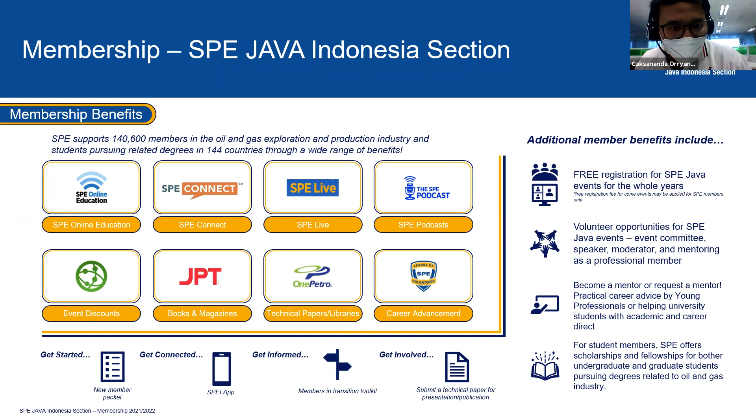Next slide, please. Sorry, technical difficulty. Can you still see my slide? Yes, but it's still freezing. Okay, sorry.

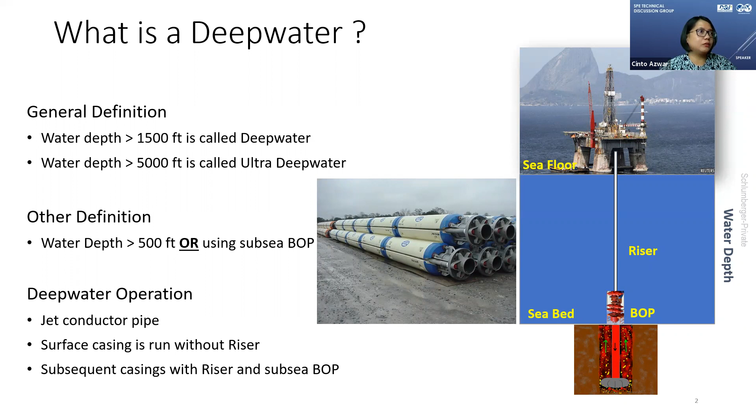Okay, next one. Do you see this? How do I move this one? Do you see the one on top, on the screen on my slide? Oh no, do you see the control, the white control? No, it's just me, it's blocking my view. Oh okay, it's from the Zoom.

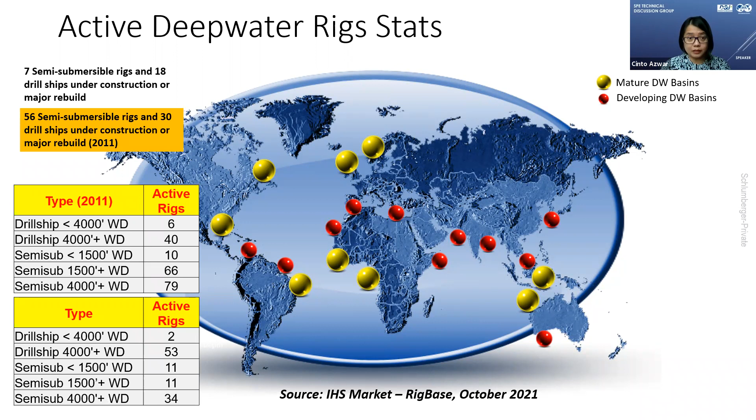And you can see that at that time, they were also building a new semi-submersible rig, 56 of them, and 30 drill ships under construction. So 2011 is when activities started to pick up quickly after the 2010 very short-term downturn, and then we were quickly picking up, especially after the Macondo incident, raising activity including deepwater as well.

This slide is another one with a very similar message, just to let you know on the... hold on, I'm messing around again with this view, now it's blocking my view.

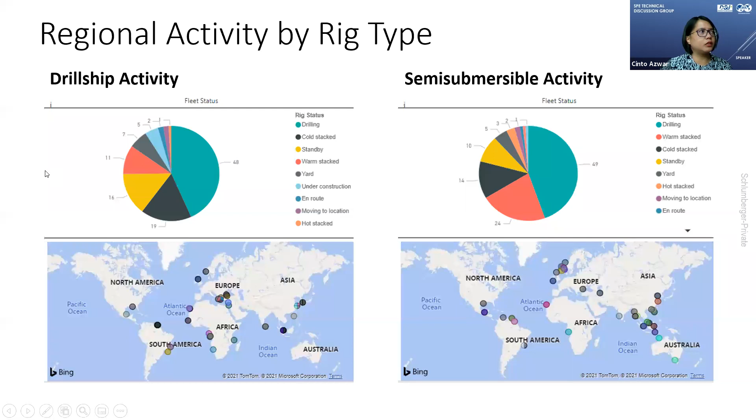About regional activity by rig type. It's the same numbers, but distributed into different areas of the world between drill ship and semi-sub.

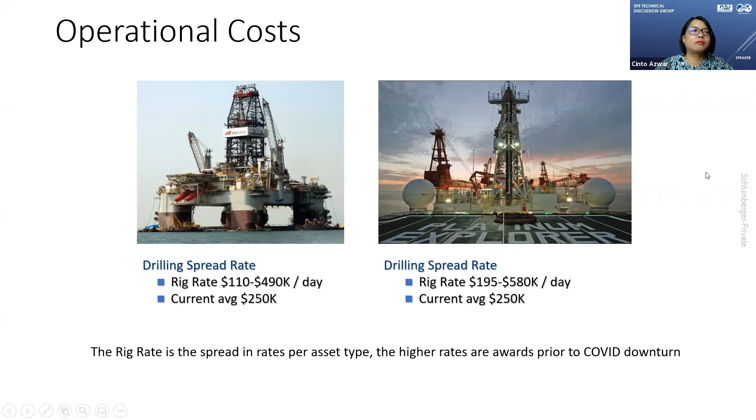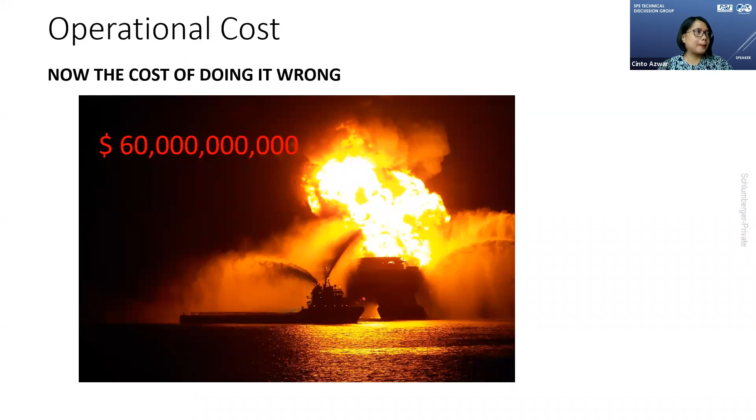The last data shows the operator needing to pay criminal and civil penalties, natural resources damages, and cleanup costs, easily reaching 60 billion US dollars by now. For those of you who haven't seen the movie, go watch it.

Since we're all working in the energy industry, it's very interesting because all the technical terms are there, and it feels so relevant to your life, especially if you've worked on a deepwater rig. It's very interesting - you'll find out what's going on, with a lot of drama added of course.

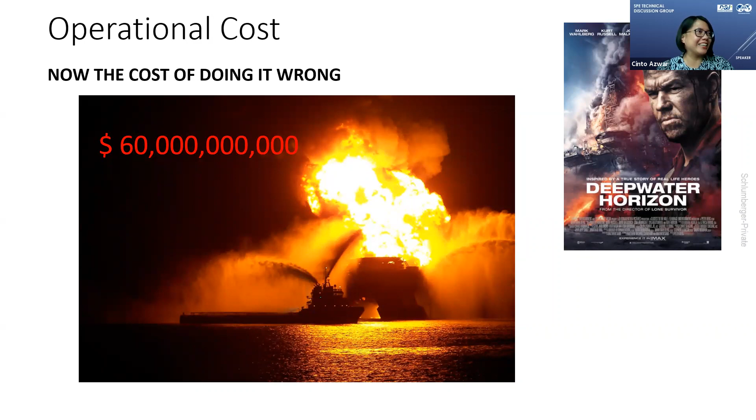And of course this involves high pressure at the bottom hole pressure. Okay, so up to this point, any questions?

I think it's very interesting, the data you presented. Between 2011 and 2021, it seems to me that even though the number of rigs is reducing, they're moving towards deep water. Does that have to do with formation availability - drilling deeper every year because the shallow ones are already drilled? Or do you have any opinion about that?

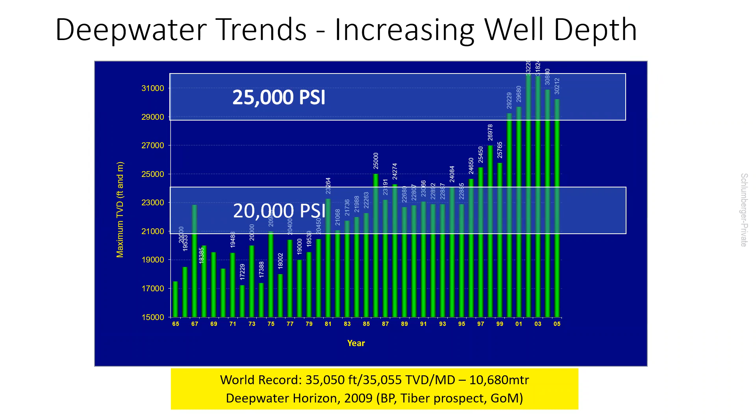Yes, basically they wanted to reach the biggest reserves available. The higher the market, the bigger the demand, then they calculate and it becomes economically profitable, so they go deeper. From 2011 onwards until the downturn, everyone in the industry was investing a lot, because they wanted to facilitate this ambition by the operator to reach that reserve and produce. That's why the drilling companies, the rig companies, were investing and building so many rigs at the time.

Probably because the price is also pretty similar between semi-submersible and drill ship. It's getting cheaper, the rig spread rate. And then the number of rigs is gone, because there's less demand - it's too expensive operating to try to produce oil that's a lot cheaper than it's supposed to be. The ideal situation, when people were drilling a lot in the water, was at $100 per barrel. So when it goes down, they chop off the deepwater rigs, especially the old ones, retiring them in the junkyard.

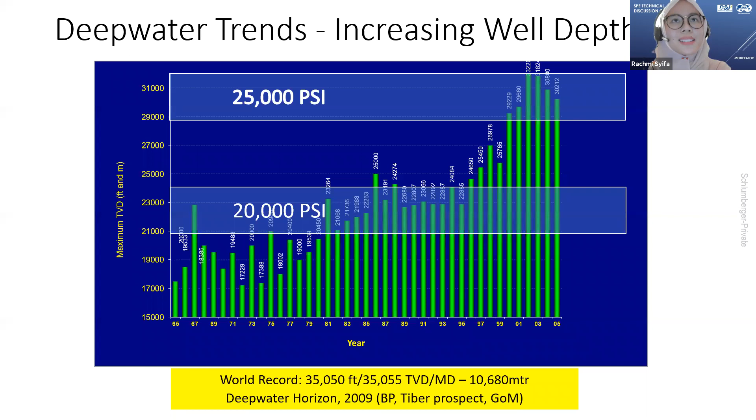The Chevron IDD is of course directly related to economics, right? So, the Chevron IDD plan is to drill and develop their field more after West Seno, but it got delayed, and with the 2020 downturn, it's going to be difficult. I don't see it, but we have people here in this call, like Mas Bayu, who are going to start up their deepwater operations, right? So some operators see potential because now we see the oil price is increasing, right? It's going in the right direction for us working in the industry.

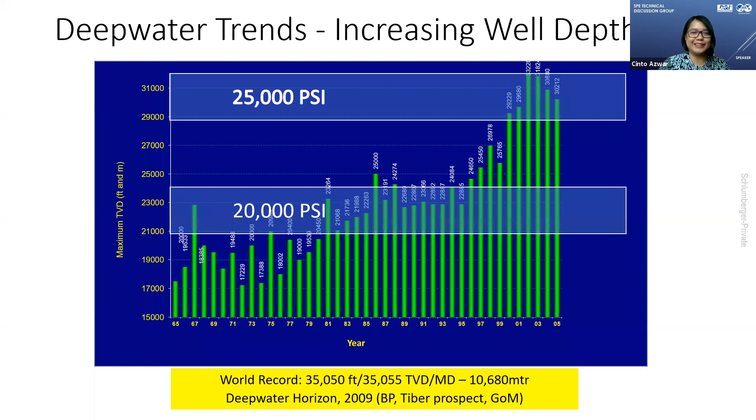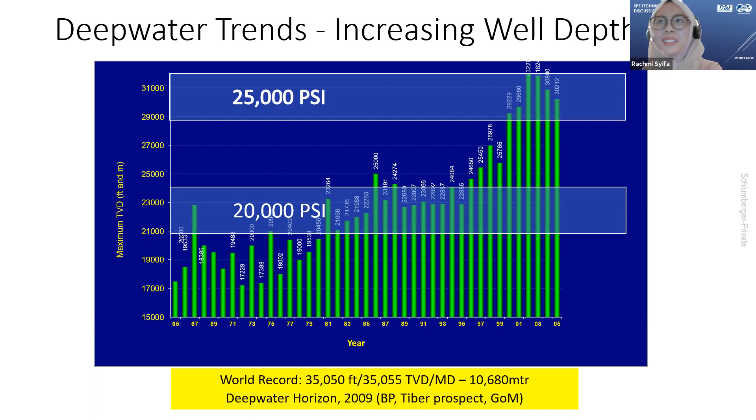So investors or operators that have locations in deepwater in Indonesia are starting to drill again. I know two operators are starting at the beginning of the year, and some of them are actually attending this call. So we are excited, hopefully we are back to 2012. Yeah, fingers crossed, Mbak Cinto. Looking good so far. Okay, continue Rahmi, go ahead Mbak Cinto.

All right, so now we go to the overview of cementing services in deepwater operations. It is a mature and emerging market, nothing new, so we all know the challenges. The industry already has the right technology, mitigation plans, and solutions for these challenges. So the cementing challenges are becoming technical drivers in deepwater.

So all the challenges we see, for example operational cost - we want to reduce the number of standby or waiting periods. That's why even the rigs now come with dual derricks, so when they're still drilling, they already start running casing. I think you've seen this before, right Rahmi? In drill ships, it's really possible now.

Operational cost is one of the challenges that everyone in the industry will find a solution to lower down. There is also shallow hazard challenges, which include water flows and gas hydrates. And then we are dealing with a low temperature environment, because the seabed temperature could be as low as 2 degrees, or even 0 or 1. Usually it's around 2 to 4 in Indonesia.

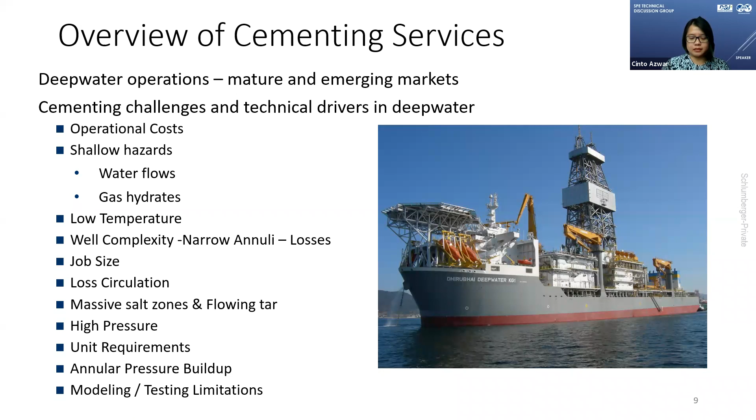You have what they call annular pressure build-up, which also only happens in deepwater wells. And then there's temperature modeling that has to be accurate. The testing is also different than in other environments.

So now we go to the first challenge, shallow flow hazard. In deepwater areas, we often find heavily water-saturated or high water pressure formations. Geopressure sand bodies usually occur on the top section, between 600 feet to 2,500 feet below the mud line. There are 3 types of shallow flow hazard: water, the most common one, flowing once you open up the hole; gas or hydrates; and formation fines.

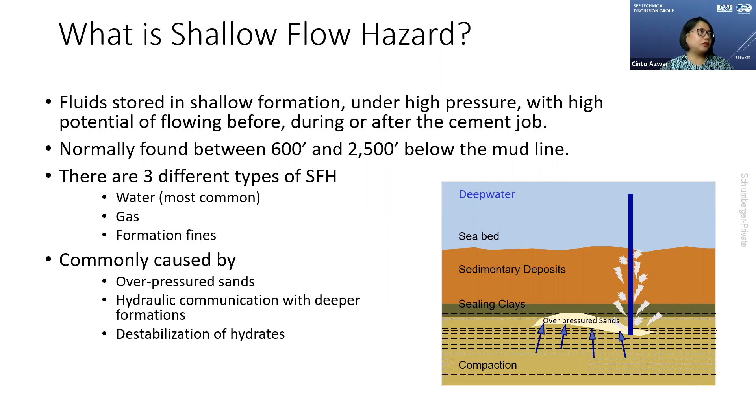It's commonly caused by high overpressure sand at the top section. If we drill into one body that is isolated, probably the result is not too bad, you can handle it while you're drilling. But if the sand bodies are connected to different sections, drilling into one of them can cause water to flow or gas to come to the surface, causing extensive damage to the borehole and the well site itself.

So how does the shallow water flow look like downhole? I have a video here showing the shallow water flow, one example at the seabed. The movie was taken by the ROV on the seafloor. Let me just play the video. It's without sound.

Okay, so you can see from the port, the low pressure wellhead, the water is just flowing because we cannot control it. We fail to control it, right? So this is giving us a safety and environmental risk.

This flow can occur while drilling the riserless section, the top section. If we do not mitigate properly, it can also occur during the cementing job. And if it happens during the cementing job, or after post placement of the cementing job, then you will lose the isolation that you are expecting to get from the cementing job.

The erosion of the seabed and drill hole due to the continuous flowing of water can weaken the structural support at the seabed on the conductor casing, reducing or failing the integrity of the BOP and the riser. It's very difficult to remediate or fix this. You can easily lose your well because of this.

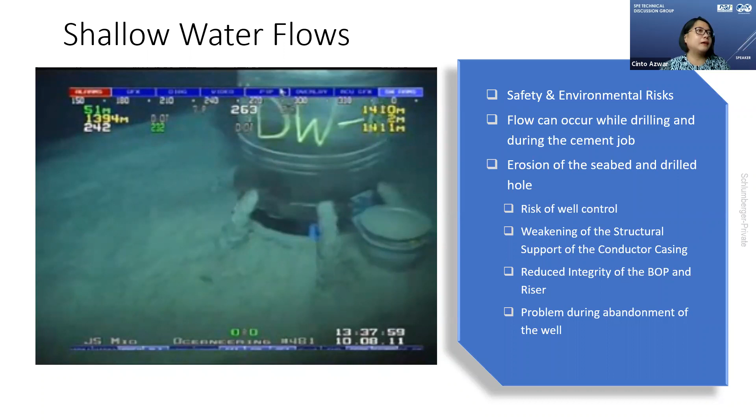So it's really important and crucial to be ready and have a good subsurface assessment, so you know if you do have this kind of risk. If you are drilling an exploration wildcat well and you have a doubt, my suggestion is do not take any chance, because once we have this flow, it's very difficult to remediate. It's a very high cost risk. The next one is hydrates, or gas hydrate.

So what is gas hydrate? It is a solid, ice-like compound of natural gas and water. It is formed in high pressure and low temperature conditions. And how do we destabilize the gas hydrate?

If we know from the subsurface reading that in this section, on the top section, we're going to expect a gas hydrate bearing zone, then we need to put different mitigation. We need to make sure that we won't destabilize it, or we move to a different area where there is no hydrate - that's the easy one. But if it's not possible, you have to go through that part, and there is a way to make sure that it's not destabilized. It will destabilize when the pressure is decreased or temperature is increased.

The gas hydrate near the seabed, for example, will be exposed to the drilling fluid, which has a higher temperature. And then cement hydration, when we pump the cement, will also release heat of hydration, and that will also destabilize the gas hydrates that we have in the formation. So those are the sort of things that we need to avoid.

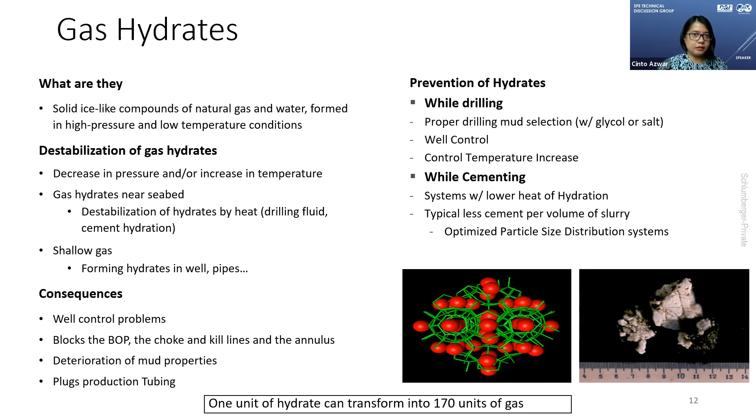This typical cement basically has a lot lower concentration of cement per volume of slurry. So there is a type of cement that has engineered, optimized particle size distribution with small cementitious material content, and this one will help you because it releases very low heat of hydration.

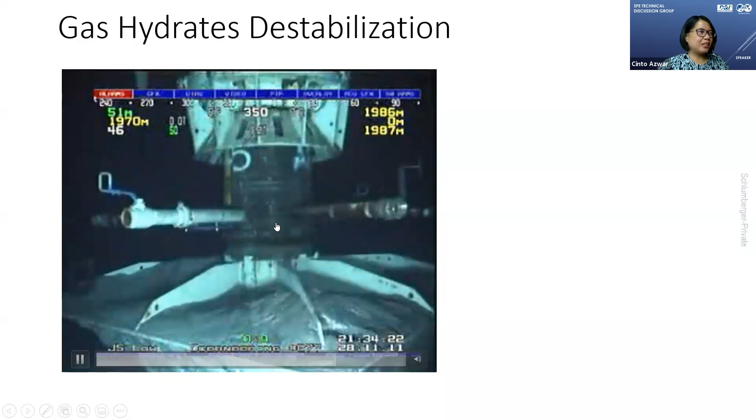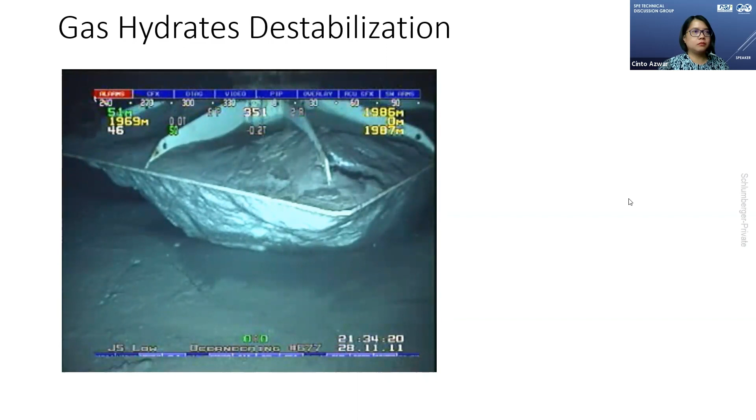This I showed you in another video of hydrates risk, which already happened in this video, and it's huge. It's forming a huge block of ice and still flowing gas to the surface. So, short video, no audio. You can see here. Okay, and this is the production tubing that is already plugged with the hydrates.

Okay, continue Rahmi. So we have an interesting question on the chat box from Pak Priyo Utomo, a quick question to Ms. Cinto Azwar. From the 2010 Deepwater Horizon incident reports, BP had been told weeks before the explosion that the cement slurry that would be used for the well was unstable. Halliburton, responsible for the cementing process, reportedly carried out two tests of the mixture which indicated that the foam slurry was unstable. Was Schlumberger later supposed to run the CBL or other QA tools, quality assessment tools, showing critical cementing conditions? Could you elaborate more on why BP site engineers paid no proper attention to such seemingly unsafe situations that finally led to the huge incident?

It's a bit awkward, Bapak, Mbak Rami works in BP.

No, it's okay, you go ahead first. I'll try to add some additional comments on this at a high level only, Mbak Rami. So you know everything in detail, it means you know it started it. So then at least it's a good thing, because then you know how important it is to do a cement design and execute the cement job the right way the first time, right?

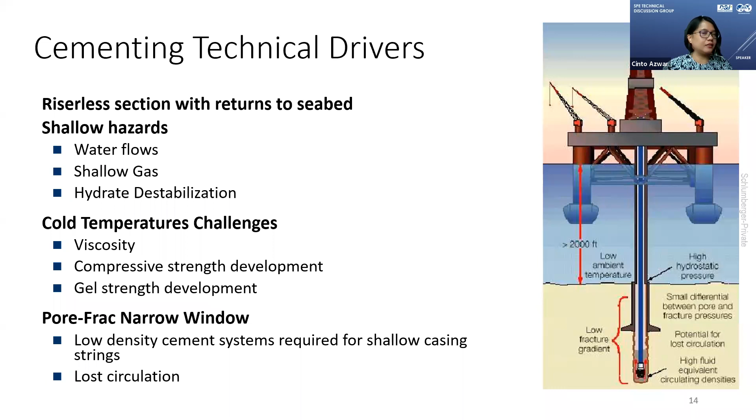Therefore, for cementing, a low density cement system is required for shallow casing strings. And then lost circulation is also there due to this narrow window, right?

So again, here I'm going to quickly explain before we go to the cementing solution, how do we actually see the challenge when the slurry can be invaded by gas or fluid at any point during the hydration period.

So I'm going to explain the 4 phases in the setting process of the cement slurry. It is important to know and understand at which point in these 4 phases the slurry properties matter, and what slurry properties we need to achieve in designing the cement slurry in order to mitigate any fluid or gas migration into the system, in the annulus.

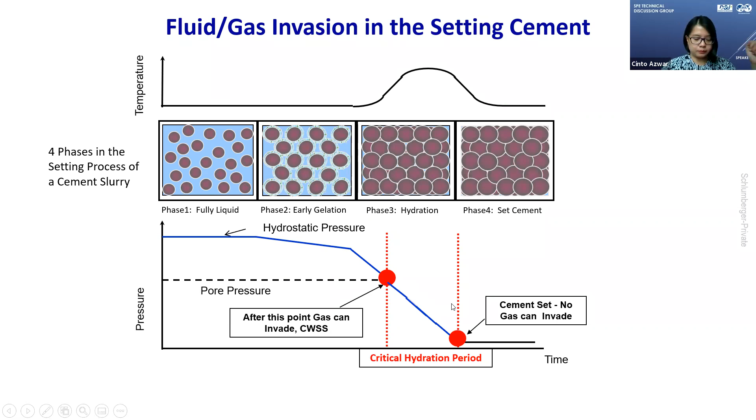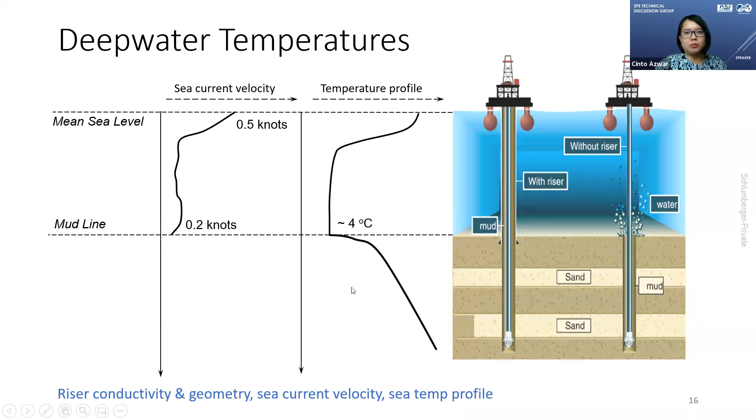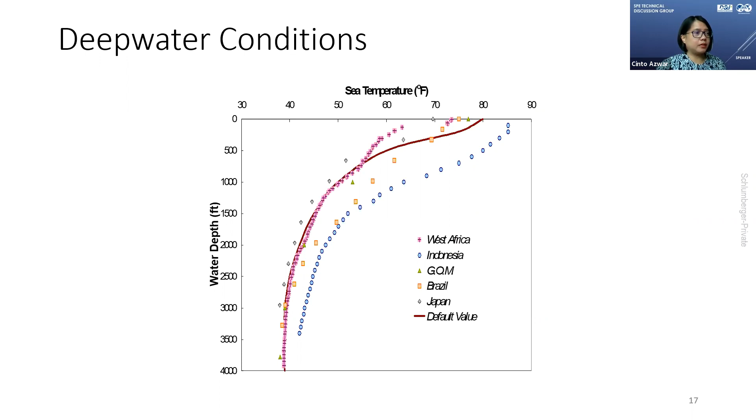Just showing you some plots of sea temperature against water depth from different areas and different times around the world. This one is from Indonesia. We also plotted Gulf of Mexico, Brazil, and Japan. This is from real measurements.

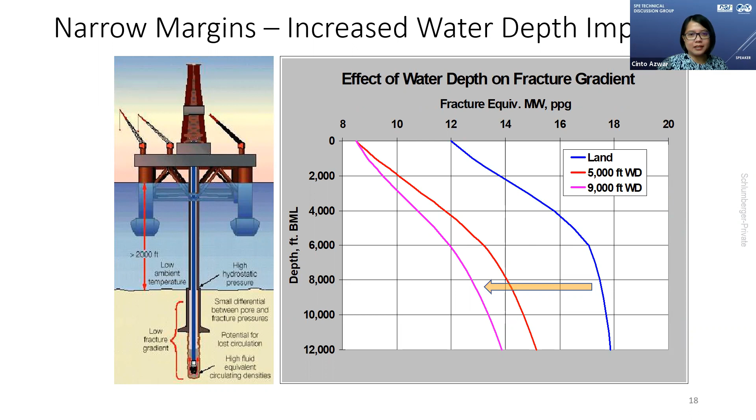This is an actual measurement comparison from Gulf of Mexico between jackup or shelf operation and the deep water one. So this shows how narrow the window is that we are allowed to operate in, from drilling and opening up the seabed at the mud line until we reach TD. The envelope available for us to drill safely is very narrow, compared to the jackup operation here on the left, which is very big.

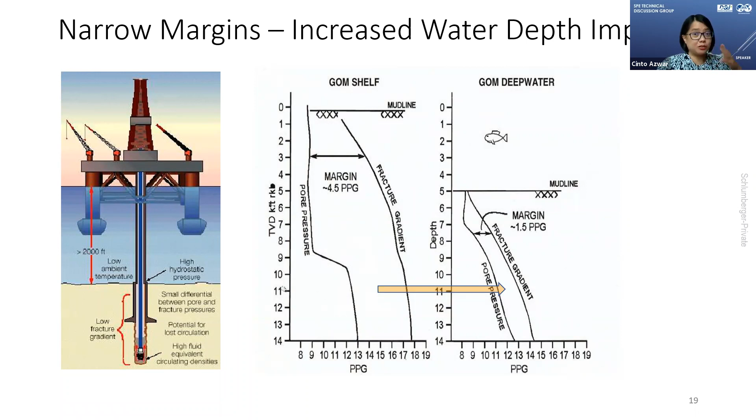So that's why you can compare, especially in the top section, you usually have a bigger window to operate, and then once you reach the production zone, it narrows down. But in deep water, you start very narrow, and then you probably stay narrow until the end, because once you reach the reservoir section, usually you will get high formation pressure also.

With that said, of course, we expect a very complicated, complex well design. This is one example. The reason we must go with this complex well construction design is because of all those challenges I just mentioned. The more you add number of strings... over here you can see we have 8 strings, and this is typical. It's not uncommon, you go to any well in Gulf of Mexico, you will see something like this.

So 8 strings, 1 contingency liner. They also have salt, especially in Africa, they have flowing tar, and of course low temperature, hydrate. What else do they have? Due to a lot of casing and liner of different sizes, we are dealing with narrow annulus when cementing the section. And of course, they also have a high pressure zone at the bottom if we are dealing with a high pressure deep water well.

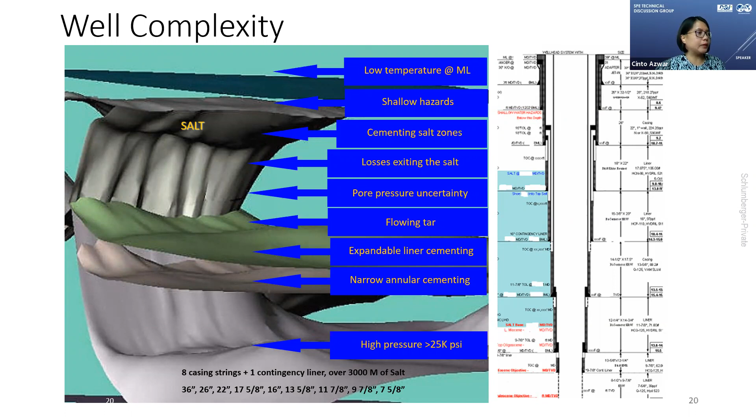So what kind of slurry properties are we aiming for with these challenges? Density gives a direct impact, of course. So we want to design it at low density appropriately, according to the envelope given to us.

Although it's lightweight, it has to have early compressive strength development, because we don't want to ask the rig to wait for a long time until the cement is set, since that increases operational cost. So lightweight slurry with high compressive strength development should come with high solid volume fraction.

If you are an operator, you can ask if the slurry proposed by the service company has a lower heat of hydration, if you have that risk of hydrate in the gas-bearing top section. Just ask if the slurry has less cementitious material per volume of slurry, for example. It usually also has to come with an improved set enhancer, a special additive for deep water that's not required in land operations. So you'll see the difference if you're an operator evaluating the slurry recipe.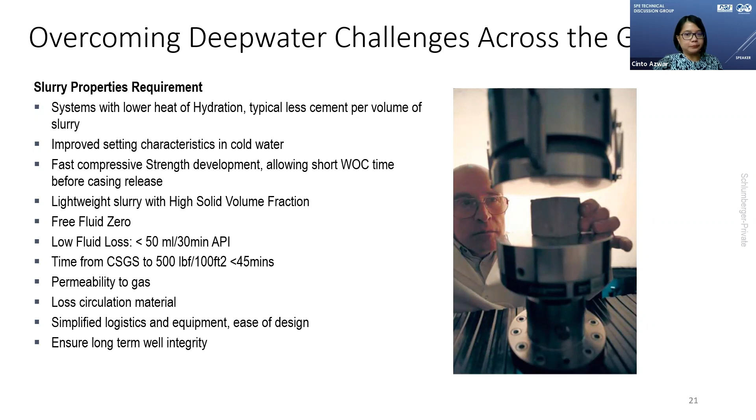Just quickly on the typical cement slurry. So OPSD is the engineer optimized particle size distribution system. Because of the water depth, make sure that the blend or the lightweight blend is competent to hold the hydrostatic due to the very big water depth. So the rating of the glass beads that is blended in the lightweight has to be high pressure, high rated.

SVF is supposed to be high as well, because we want the compressive strength to start developing very early. So this is the typical additive you can see: there is anti-foam, low temperature dispersant, low temperature set enhancer. This is the same set you will see in any deep water. There's conventional system, and then there is foam system as well. This is all designed for shallow water flow.

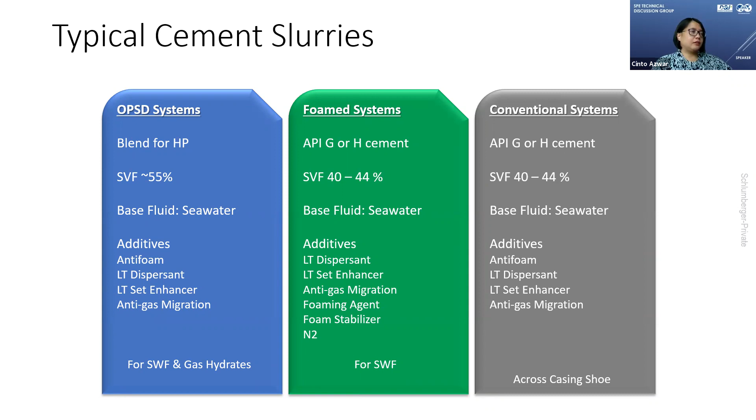We also need to practice regular cementing practice, which is ensuring good mud removal, casing good casing stand-off, centralization.

Good mud removal means we don't want to have the casing sticking up to one side of the well, for example. Therefore, when we pump the slurry, we cannot remove the whole mud completely. If we still have mud left in the hole, then our cement slurry will get contaminated with the mud. Then it will not get all the properties that you wanted to have as per what we designed in the lab.

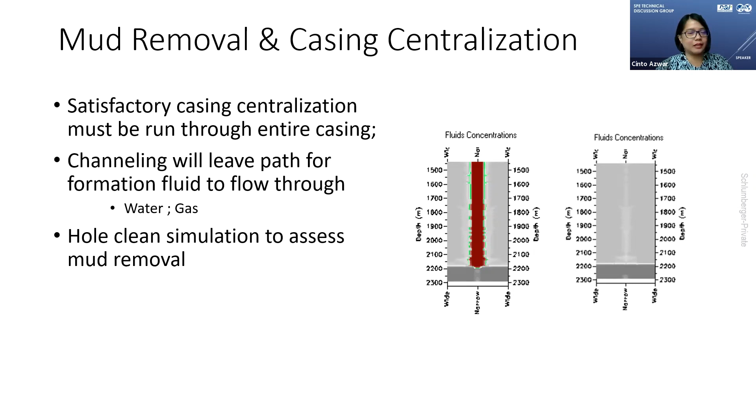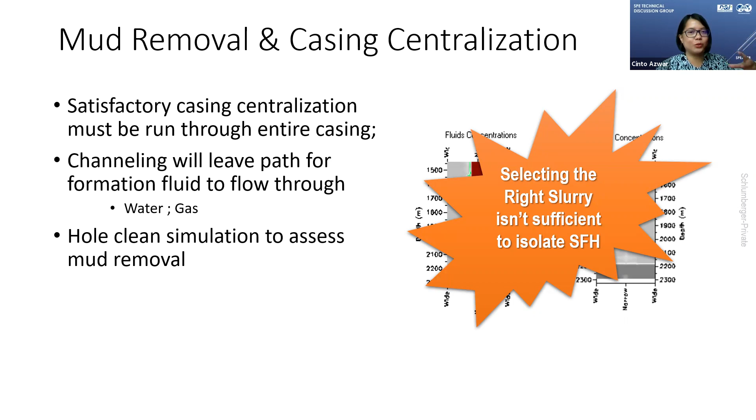We want to avoid having channeling. For all of this, you need to run enough centralizers, run the simulation with the software. All the service providers have their software now, and simulate to see where you need to put your centralizer, at how many quantity. So selecting the right slurry is not just about the fancy slurry, but it's also the rest of the practice of cement placement.

You need to have enough cement volume. A big excess is usually expected on the top section of the hole of any deepwater well. So typical annular excess in conductor casing is 200 to 300%. Surface, we are usually taking 100 to 200% open hole excess. That means on top of the hole opener size or the bit size, you put additional excess here.

Why do we need this big excess? Because the top section is very unconsolidated, and plus we are opening the hole with a very big bit or big hole opener, so it is going to create this big excess.

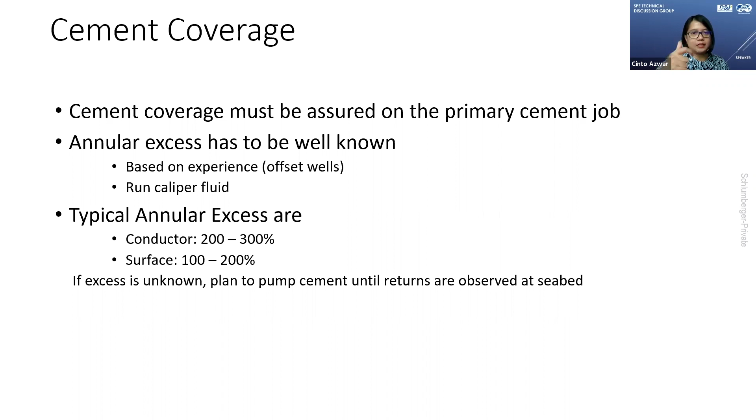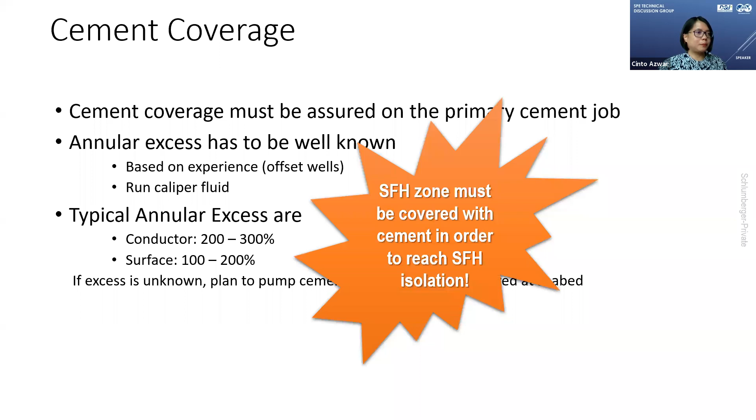We also want to make sure that the slurry is going to reach the surface, to the seabed. The whole thing from the shoe to the seabed has to be covered by the cement, because we need this slurry concrete to hold the load of the wellhead, the BOP that's going to latch on the surface casing. So it's very important to pump enough volume, enough to reach the isolation.

This is more technical calculation on the same effort of minimizing the critical gel strength period to its best. There is a given formulation to calculate the static gel strength where we start with our critical gel strength period at any point in the hole. We calculate this and then double check it against our slurry properties.

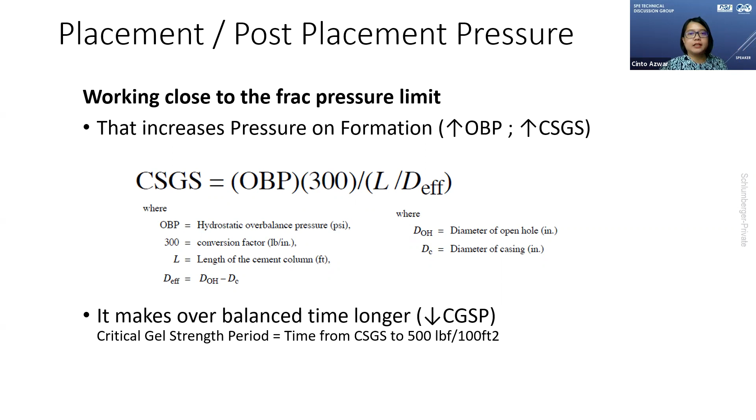So, do we have a question?

I'm curious about something. How do you balance between light slurry to avoid losses versus good mud removal or zonal isolation, to prevent gas, water, and oil flowing? Also, cement is probably one of the best loss cure materials, but how do you make sure the cement will seal the weak formation first before the circulating ECD actually breaks the formation further?

Okay, let me address the first one: how do we balance lightweight and good mud removal? The important thing is your mud is always going to be lower, if not the same density as your slurry, at least for the top section, for example, and it's always vertical.

The maximum, you cannot have angle on the top section at the seabed, because then you will have problems latching your BOP. So the top section, mostly for conductor, is going to be all vertical and maybe a little bit deviated on the surface section.

So for those two sections, if we have at least 0.5 ppg different, or sometimes I even have a case where I have to design the slurry to be at the same density as the mud. The density hierarchy is basically on the vertical section giving a big impact on mud removal.

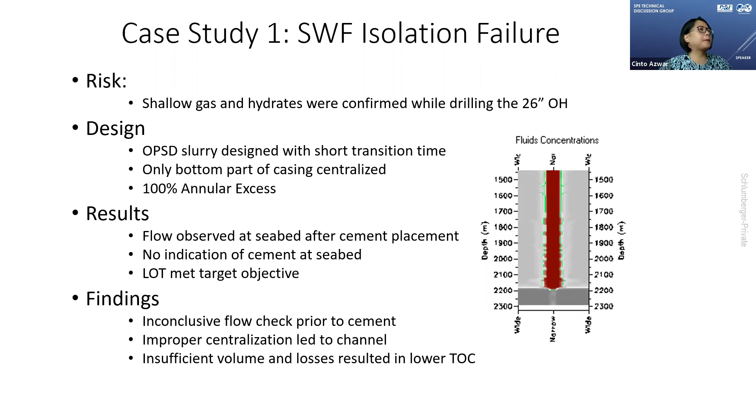Anything else? There's another question from Nisha. You mentioned about 12 hours continuously pumping, and the amount of cement pumping is also huge. How do you plan the logistics, and have you experienced any challenges? Yes, this is a very good one.

The photo that I showed you, one of our rigs in India, DDKG1 - I don't know if you remember that big drill ship photo, that's actually from my own collection. That's the rig we also operated in India. It was drilling 3 wells in Andaman and Nicobar Island, very close to Andaman Nicobar Island in India, and that's very far away, while the supporting base was in Kakinada, basically a 3 day boat turnaround.

So for us to send cement to Andaman it takes 3 days turnaround - one way 3 days. And then they had only two vessels supporting. So it's logistics basically, it's a big challenge in the water, especially if you are very, very remote, like for example that case.

In Indonesia so far, I think we have like 6-8 hours, still within reach. And nowadays, because vessels come with a low rate - I've seen one rig supported by 3-4 vessels - we're actually taking it for granted right now. Before, because everything was so expensive, we had to stretch and had so many limitations.

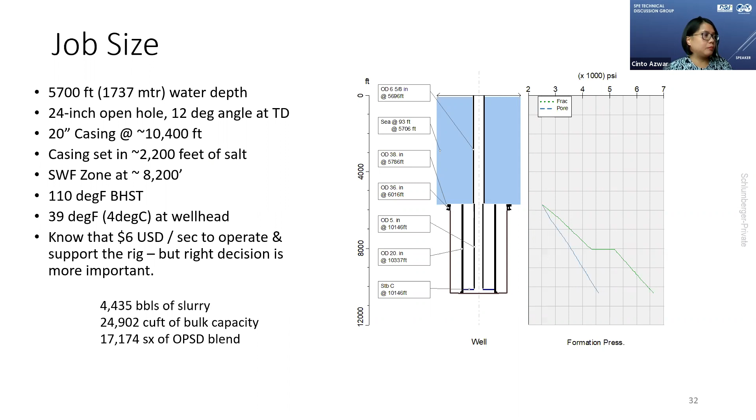The job preparation, as I mentioned, it's a good point that you brought about the remote operation and the big volume job. So the whole planning of this job is done a year before. So this is a lot of engineering in front, which is a year before for this case.

It's involving 6 different slurries because that's a long section, right? We want to have different setting time on each slurry in different layer. Otherwise, if the whole thing comes with 20-hour setting times, then we will have a much longer wait on cement times until it starts to develop the gel, the compressive strength, right?

So although it's one type of slurry density, it comes with different types of setting time, from the casing shoe to the seabed, right? So...

Extra people is required. So bear in mind, back then in a deep water operation, especially in Gulf of Mexico where everything is very mature, the cementing personnel on board is only 2 maximum. Sometimes only 1, because of the POB limitation as personnel on board quantity limitation also.

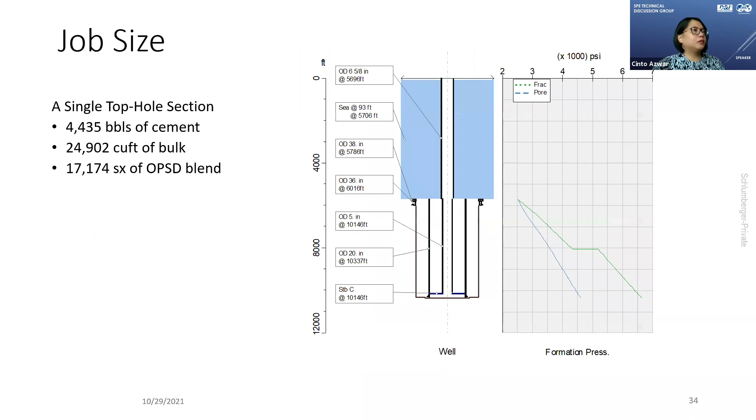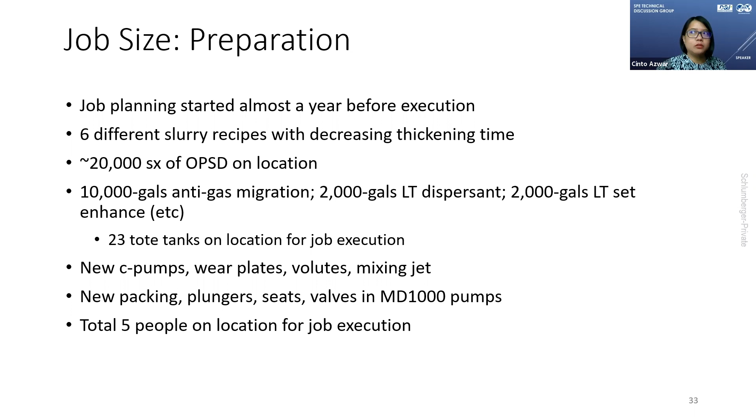So this system now, there is the one that is direct injection, directly injected to your mixed fluid line, or there is one with a drop tank. And there is also now the autonomous one where the concentration is input in the computer, and it's going to go as per the input, or you go and see your metering and you drop it manually to the big tank of mixed fluid.

So it is connected to tote tanks. We don't mix it in advance like we do maybe in land operation or in the small jackup, right? So everything has to be liquid. Otherwise, if we have a solid additive, then it's just going to complicate even more the operation, right?

Because then you need to rehydrate it, you need to make sure it's mixed properly. So if everything is liquid and you keep your number of additives simple - just the minimum is better, like just 4 or 3. If it's not necessary, don't even put it, right? So you put very minimum, keep it simple, and then you use LAS, then it's possible.

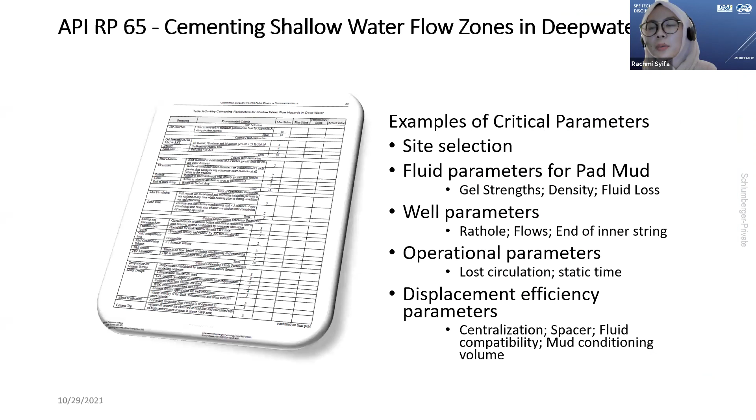So if loss circulation additives are added to the cement slurry, do we also need to add filtration loss additives? Because if we lose the water filtrate to the borehole walls, we will lose the ability to transmit the hydrostatic pressure to cement in the lower part of the annulus, and the wellbore pressure will be reduced.

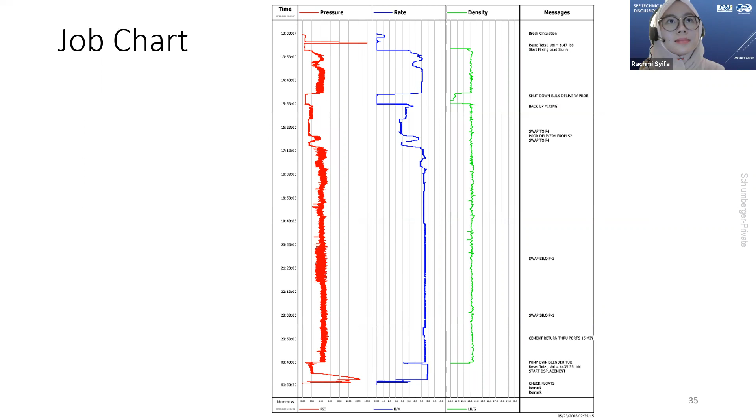Thank you, okay so that's a good one. The filtration additive control, or fluid loss - the technical term we usually use is fluid loss control. This is the additive we add to the slurry to make sure that under downhole conditions the slurry will maintain the fluid in it, even though it comes to a permeable formation, it will not lose the fluid, while it's going to be hydrated completely, right? That's the fluid loss control.

The loss circulation material is a different material. It's the one that we add to the slurry, and most of the time they are inert, so they will not give any chemical reaction or impact anything chemically to your slurry properties. Like you can put flakes, fiber, so it's not going to impact your fluid loss level, for example. So it's not connected to each other - that's what you usually call inert material.

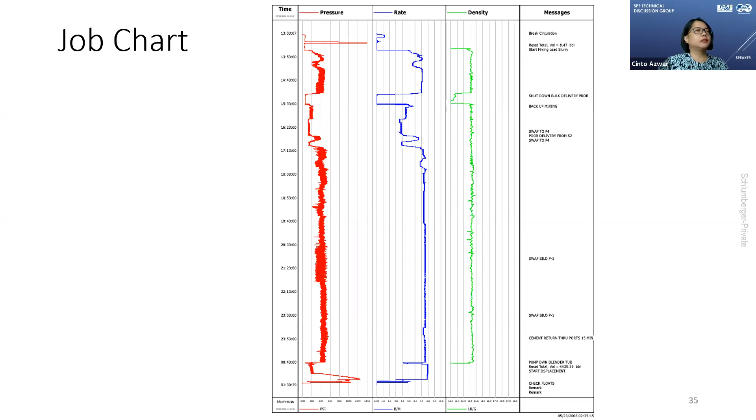So everything at the subsea wellhead is sealed completely, and there is no possible way, like in surface operations or a regular land operation, where we can bleed off the pressure in the annulus through the valve later on easily, right? So in the subsea wellhead, everything is metal to metal seal, which you cannot access. So, having this in the wellhead...

When we drill the well and then cement it up, there will be fluid trapped in the annulus, right? There will always be a risk of fluid trapped in the annulus. Once the well is in production or in drilling, maybe the temperature will rise. This fluid will be exposed to that high heat and will expand. When it's expanding, the pressure will find the easier path or way to release it, right?

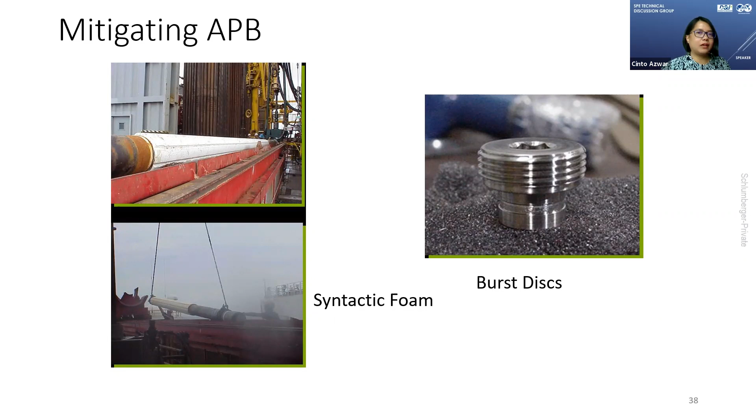You can also pump some foam spacer. There's so many things that the operator can also do, take this in mind, and plan this ahead instead of later on not being able to provide the correct mitigation plan and having the casing collapse.

From fluid, as I mentioned, another mitigation plan, you can pump the foam spacer, just to give it way to expand, to be compressed, because a foam spacer is compressible. So that's the APB, again, a unique one that we found only in deepwater.

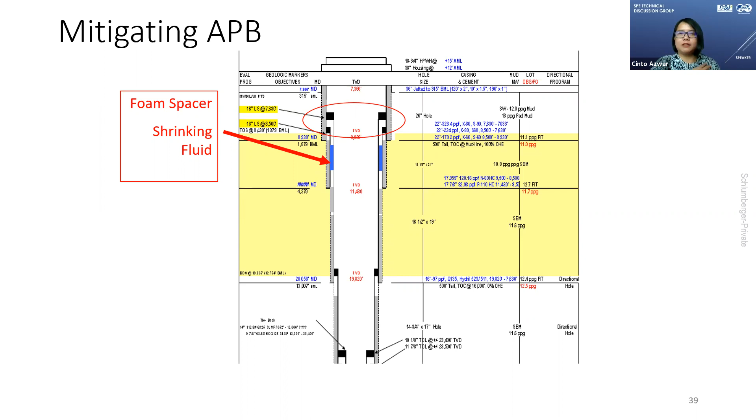So is it about any question right now, Rahmi? There's a question, follow-up question actually from Bang Isan. Relating to the previous slides or presentation, is the cementing unit and pump specification different between the conventional offshore and deep water?

The difference is usually the cement unit specification has to be in the same level as your rig specification. So if your rig is capable of drilling 10,000 feet water depth with 10,000 feet of first section with 12,000 cubic feet of bulk capacity, then your cement unit will have to be also at the same competent level. So it's something like that.

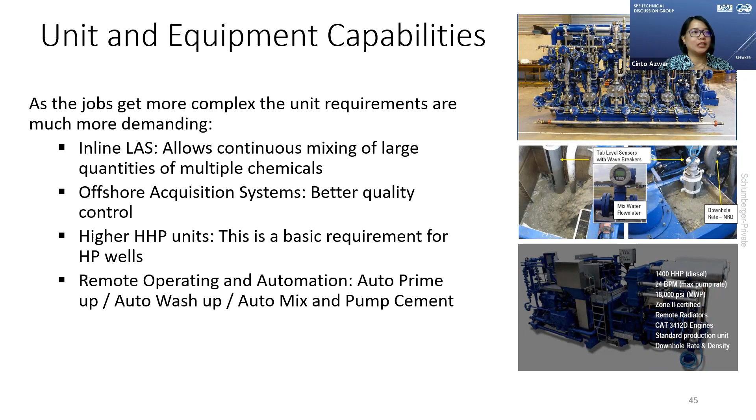Okay, so last one, this is about compliance. We talked about it during the Q&A before. After the Macondo incident, this API standard used to be API RP 65-2, which was a recommended practice. After Macondo, they formed a committee of different experts from different companies and backgrounds in cementing, and they standardized it and improved the contents.

So everything is a must now. They went through it again, so it signifies that the cementing committee's attempt and all effort was on the table to take into account all the lessons learned from the Macondo incident and take steps to limit exposure in these areas going forward.

The objective of this guideline is first to help prevent and/or control the flow just prior to, during, and after the cement job. And then what else? So it is...

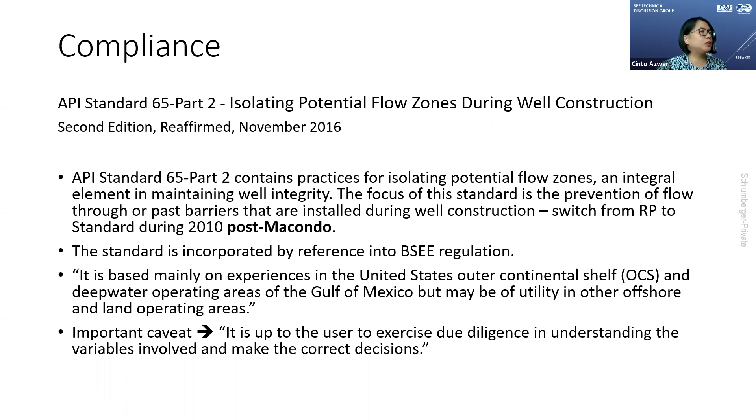I think we all know it is mainly used in the Gulf of Mexico, but I think everyone is using API standard, right? I wanted to show a different standard. It's not just API standard 65. There are many different API RPs and standards also related to deep water.

For example, the API RP 96. This is deep water well design consideration - it identifies considerations for use in deep water well design. There is also API 10B-3, which is about testing of well cement used in deep water well construction. This has all the details about how we should test the cement slurry for deep water purposes.

It's very thorough, very detailed. If you want to start a deep water operation, or want to know basically what the slurry requirement should be, go open this. You'll see, you get all the information there. Therefore, you can also challenge the service provider.

And then there are two API RPs that I put here, RP 90 and 90-2. This is all related to SCP, ACP - annular casing pressure, which includes sustained casing pressure, or what we usually call SCP. One is for offshore, the other one is for onshore.

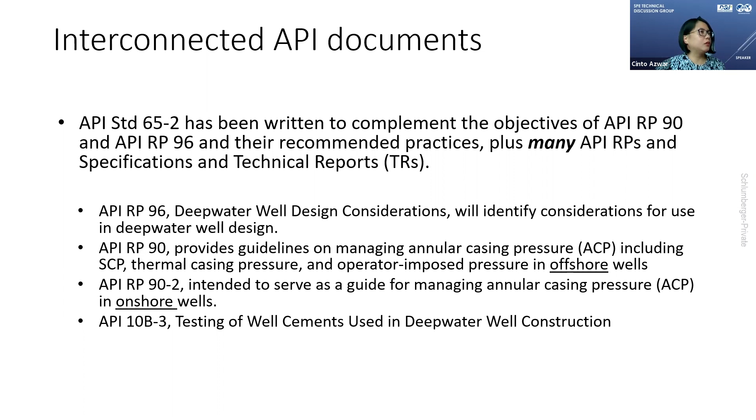So just quickly, in the API standard 65-2, it has best practices for zonal isolation. It's not just all about cementing. So you can see guidelines on hole quality, drilling fluid - what you should have in the drilling fluid, about the casing hardware, wellbore preparation, cement job execution, and the post-cementing operation.

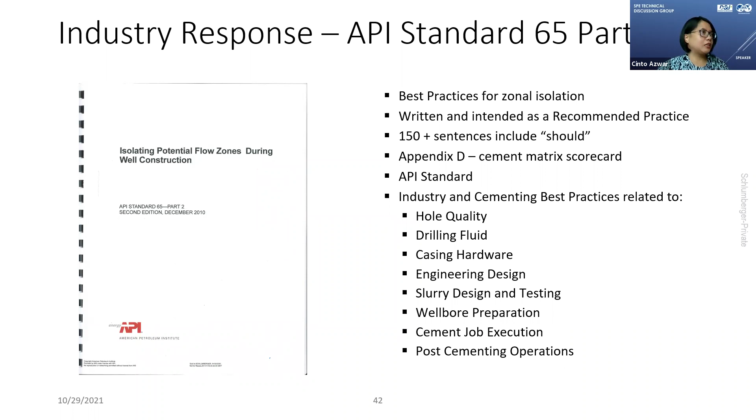This is also a very good guideline if you want to assess the job you are designing right now. We want to take into consideration all the points when designing the job, the deepwater job. Go and also check this one - it has very critical, very detailed critical cementing fluid parameters. Very good information.

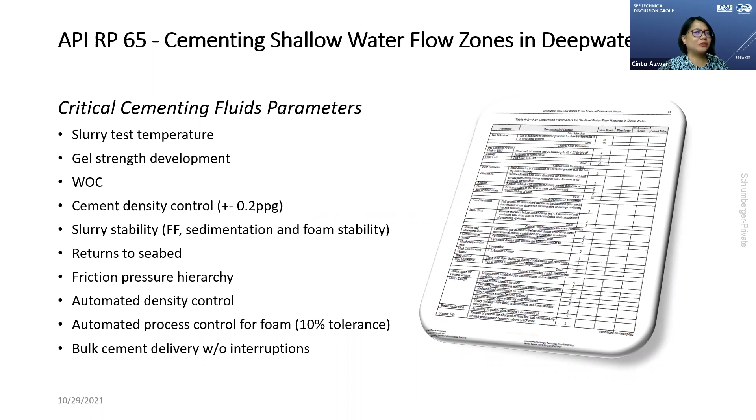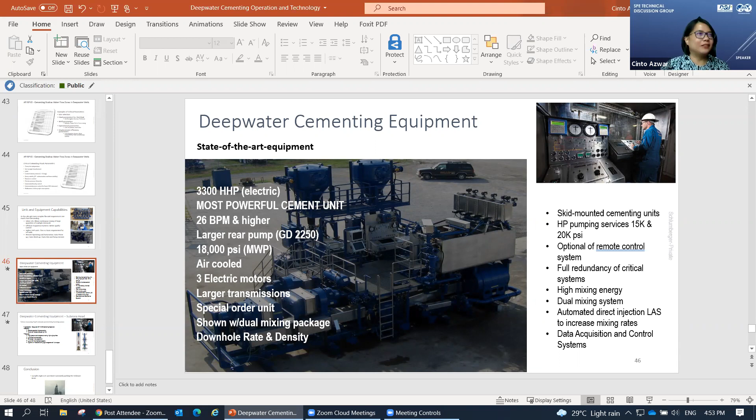Rachmi, it happened only after you cemented, because there is no other way, unless the formation is very strong. If it's very strong and not flexible, then it's just going to put the pressure towards the casing, right?

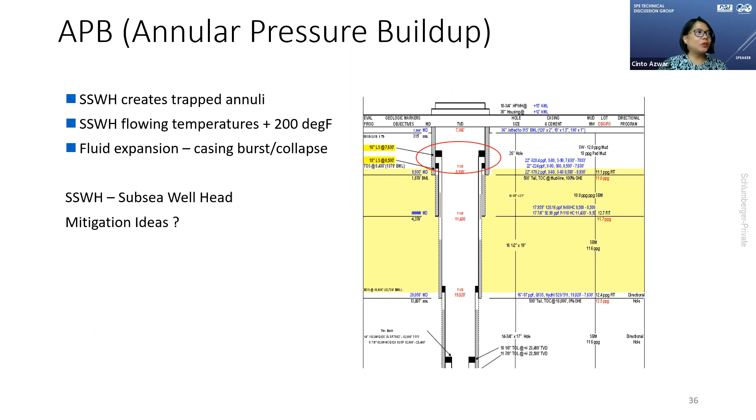So this example you're talking about during circulation, it could be also what happened. This is not cemented, definitely, that's why they can pull it out, right? So in this case, your mitigation plan has to burst this. I believe this is related to your fluid, because of the temperature rise, the fluid gets expanded and then it just bursts here because there's no way going up, right?

I think so, definitely this is what your question is. Because they managed to pull it out, so definitely it happened before the cementing job. That's right, you're right, yeah.

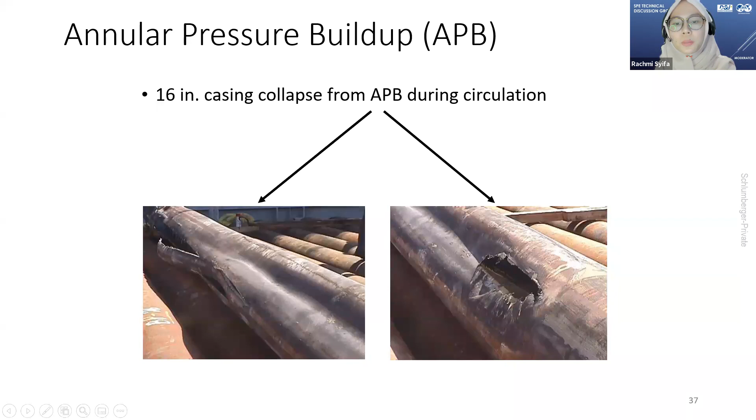capture the moment today. So everyone, if you could please turn on your camera. Someone is joining from the rig. Pak Ferdiansyah. Okay. But Ian, can you help us to? Yes, Okay. I'll take a picture now, yes? Okay, be ready. 1, 2, 3, cheers.

Tunggu Mbak, Pak Prijo nih masih. Nah, Okay. I'll Lagi. repeat ya. soalnya ada effort. Pak Priyo. Ayolah. Okay, ready? Ya, Okay, 1, 2. Okay, some more people is still turning on the camera. Maybe we wait a little bit, yeah? Yeah, sure. Let's give a chance for everyone to turn on the camera.